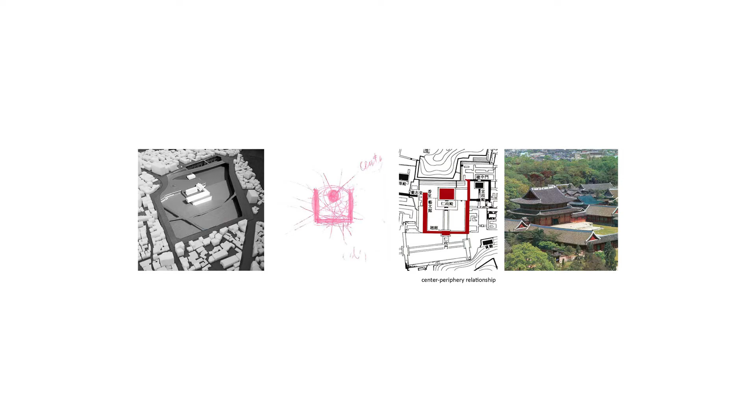As a way of translating that into a physical scheme, we leave the memorial building at the center, carving out an average of 10 to 18 meters around it - so it's like a huge bathtub. That becomes the center, and it begins establishing the relationship between the center and the periphery conditions.

This has been the case in temples and palaces, in all monumental buildings - a center is established and the periphery supports it. That relationship and interaction between center and edge could be an important element for this memorial, because since we are putting 140,000 square meters of cultural facilities, this has to be part of the memorial - it cannot be an independent element. In many ways, it's wonderful to have this future industry relate to the past memory. Past and future are related. So the diagram shows, like a palace, a central piece and the periphery of it.

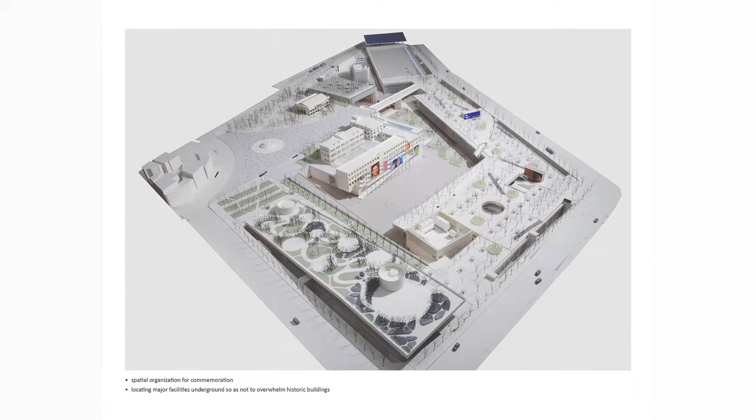The center and edge relationship is a historical pattern of tradition, relating center to the edge. By having that in the center and carving out 14 meters around it, at that point the height becomes almost 7-story high, and it's very much enhanced as a central piece. It is the piece of the center, and that facade relates to the rest of the project.

At the beginning, the entire site was flat, but I'll explain the process later. During that process, portions of it, the south portion as well as the north portion, just lifted a little bit because there was a lot of opposition. But at the end, I think the scheme was actually more improved.

The initial idea was to put the building underground so it does not overwhelm the existing memorial itself. So the memory is commemorated by the location, by the enhanced spatial structure, and also the light itself—this park will have light, and all those things together. But more than anything else, the idea is that the Asian Culture Complex, which is a futuristic, future-related cultural facility, becomes part of the memorial itself.

Second point was that when I first got the competition kit and looked at Google Maps, the desire was to carve out the gray. It is so gray, and even in Korea, comparing to other cities, public open green space is very sparse specifically in Gwangju, and this area has a very limited amount of green space.

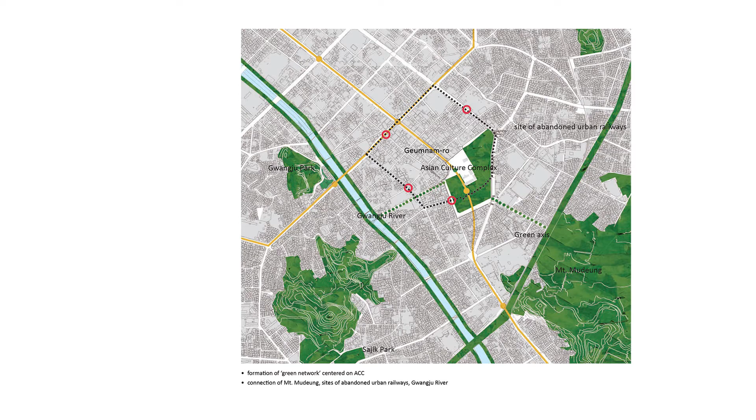The consequence is that there's 110,000 square meters of open space created in the middle of the gray city. Also, as an urban design strategy, the surrounding area is going to be very haphazard—there's no collective regulation or agreement, and we don't know what is going to happen.

In that case, I take the example of Central Park in New York, on the West Side. There's tremendous contrast between the built and unbuilt, and I think eventually the building is going to build up. So in a strange way, the open space itself is even a stronger urban form generator than the building itself.

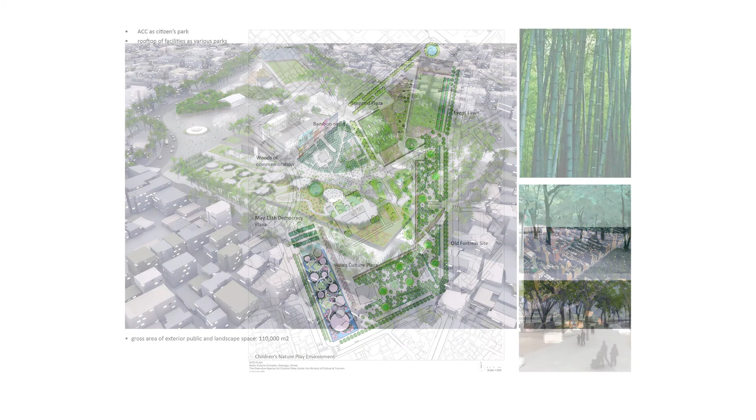We have developed bamboo trees and native trees, children's playgrounds and park, and at the end a huge, about football field size, sloping lawn for public events and so forth. So this becomes a park overall with a variety of landscape and program areas. There's also a historic wall, and the skylights in the park are elements of both the memorial and the park itself.

I've been occupied with this idea about extrovert versus introvert for a long time. When I first left Korea, the most striking scene for me was the contrast between Western cities, Western architecture, and what Korea had. I think it is especially true in the case of Gwangju.

Gwangju has a very strong cultural identity as a place, and it is very much so socially in Korea as well—the family, the school, and the region. There are layers of enclosure, wall, and boundary-oriented organization that have been very strong. It's eroding, and I think there's a desire to change it, but it's an identity, and I think it can be valued.

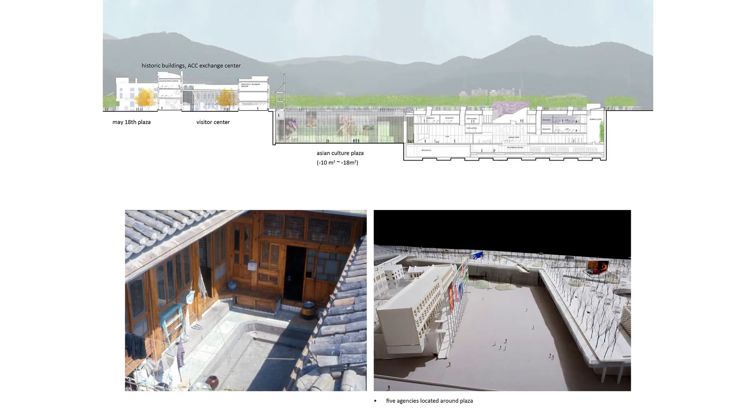So the Asian Culture Complex will have these 5 different agencies. Those agencies are going to be connected through this courtyard and it becomes the central space. At the same time, I think this is true not just for architecture, but for connections to the outside generally—we're getting more and more into it. I think that connection and the web is going to be more and more important in our life now.

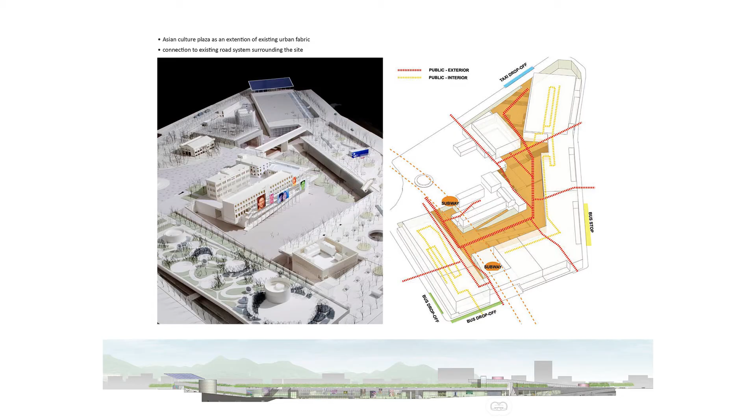But in this instance, because it's a major urban space, for the town we have made many connections. Especially the central courtyard is about 600 meters, so even with 12 to 18 meters you can have a very gentle slope, so service and emergency vehicles can all go into it. That's a major connection. Interestingly, many Asian cities have underground shopping malls and subway stations—we have 2 subway stations connecting here.

That comes out to the level of the Asian culture plaza. So those connections, both linear and perpendicular, connect the city and try to make a seamless connection from the city coming into it. In that way, I call it the extroverted courtyard—it's a courtyard which is defined by boundary, but it's extroverted by connections.

And that shows main space. And the other element is light I mentioned already. Gwangju is a town of light. I think even industry-wise it's optical, the product and so forth. So Gwangju and light is quite interrelated.

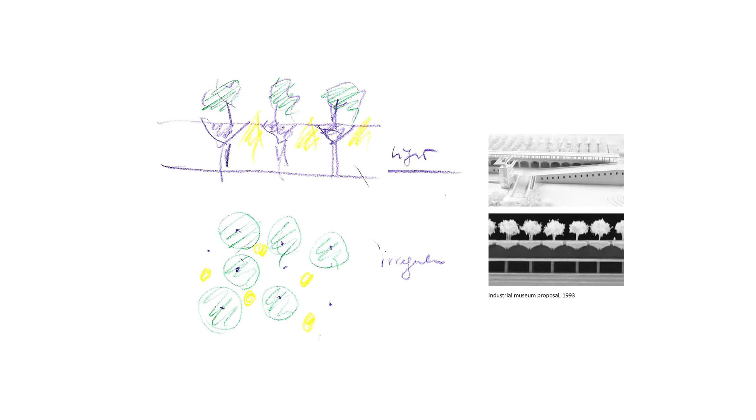And I myself, personally, was preoccupied with exploring rather non-architectural elements, but natural elements like light and forest. I actually started thinking about it back in the 90s. I developed it continuously, but incidentally at the end, it just turned out that my interest has been connected to that. And because it's underground, at the edge of it,

it's carved out so that light can go into it. I call it bamboo court because it's planted with this bamboo arcade kind of space. And there are a lot of light chimneys in the middle, which become both a means of bringing light into it and bringing light out to the outside for a view of it. And then occasionally we have a light well.

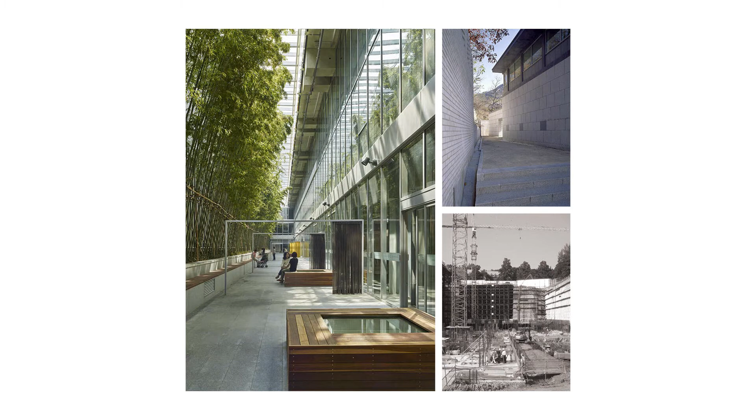And more than anything else, the courtyard itself is a major means of bringing light to the other facilities. This is an example of the bamboo court, which is about 14 meters high, a slurry wall planted with bamboo, covered with an arcade, similar to the old buildings, old walls, because the topography was such that typically the back of the house used to be against high walls.

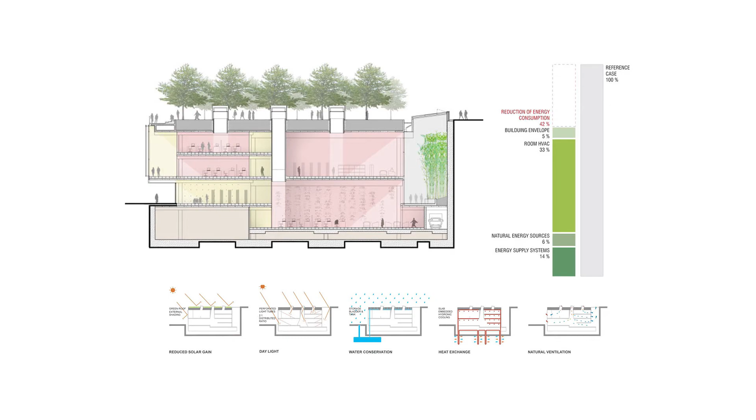Then I think light itself could be also an element of experience rather than just for functional reasons. And memory itself could encompass light as a major element. That is what is built now, the light. I think it's also very important that there's a forest of light, the multiplicity of the lights, the quantity of it.

I think it was the memorial. When the uprising actually took place, all the citizens and students came together, it was not an individual effort. And I think this light, cultural facilities, and trees, all this combination - it's not directly saying that this statue is a memorial, but it's a combination of everything, and in time one can experience it.

2005 was the competition, and even now it is relevant. But I think because it's underground, we managed to cut about 40% of energy consumption because of the thickness of the cover on top and light and so forth. And because it is a public project, significant investment from government, I would assume that this project for this size will last not just our lifetime. And then how we deal with the time issues in architecture or urbanism,

especially in Korea, especially because of politics, you build a building first before you have a program. So once you have definite programs, still, we know things are changing. I think it has changed a lot even since 2005. Since 2005, in the area of technology, IT, it's tremendously changed.

One issue is that even though we have 5 agencies, that program was almost fictional programming - in 2005 it was kind of an assumption that this could take place, but because of politics and organizational changes, it is going to change all the time. So one thing is that instead of each building, this is connected, so the boundary is going to be fluid and moving.

And programmatically, for example, performance and exhibition can be used vice versa for larger events. So with that flexibility, using the courtyard, we could make a diagram where everything is connected directly like a web, rather than a grid or a ladder.

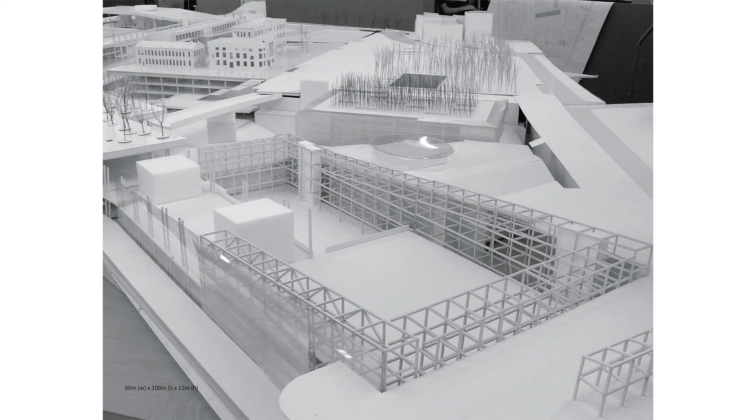And this is what has happened. It's more of a programming where the top is creation of exhibition and performance, and then archive research, and the children's area is slightly different because it has different requirements, but the remaining parts are all connected, and the courtyard becomes just like a courtyard house, a center where everything is connected.

In terms of structure, there are 2 kinds of structure systems I used here. One is large - this one is 60 meters wide and 100 meters long space - and almost one could say anything can take place.

And the idea was to build the city and build a building inside a building, because for this size, as long as you provide the right context about access, light, and infrastructure, there's a great potential that things can change. So we have one option where larger spaces can be developed later, or transformed continuously, used or built by somebody else.

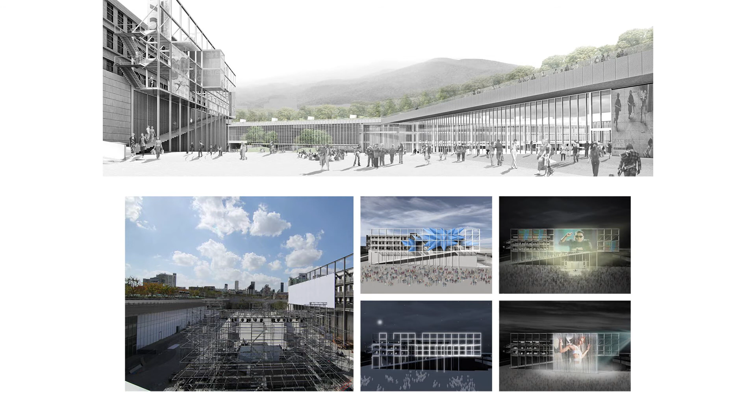The same space I use for the 24-meter precast span.

I've been looking carefully, especially at this project. If you look at the Museum of Modern Art in New York, they had an incredible, torturous process of growing, changing and putting things together this way. A lot of cultural institutions from the 20th century went through a torturous process of growing and having to change. On the contrary, 19th century industrial buildings, in my mind, are tremendously well used.

To me, that's a more beautiful art space than some 20th century museums. So the idea is that the structure itself has a long span, and inside, another element can take place.

Then the other area is the courtyard, the Asian cultural plaza, which will have what we call scaffolding, where it can be refined, but it is an element that invites other activities to take place. It's more participatory, and in the long run it can be changed. Actually, at this point, it is in danger of losing it.

They may take it down, but because preservation prevailed, I think the sense of identity can shift in various places. The idea at this point was that it could be a fashion show there, it could be a media wall, it could be an art wall. The process was interesting too, in 2005.

The first issue was that many people couldn't believe it. Their simple question was, where did the $700 million go? It's all underground, they can't see anything. For me, it took 46 presentations and 2 years.

My notion was about what they called the landmark, and landmark was an issue. It was a big political issue. The landmark has, in different times, different ideologies and different meanings, and the landmark has to be of our times. The 2005 landmark should not be the same as the Eiffel Tower, where the material is steel and so forth. Culture also has a very different way of expressing it.

The palaces in Korea, for example, are more about spaces and buildings inside. On the contrary, if you compare that with the Eiffel Tower or the Empire State Building, which were often mentioned, it's exactly different. So in our time and our place, we should invent our own landmark, not accepting or inviting other models.

Anyhow, this issue was settled after 2 years. We came up with a compromise — but not really a compromise, it was an improvement — lifting up a portion of the building at both ends, which gives a kind of sign, signaling the entrance from south and north. That's the way we settled it.